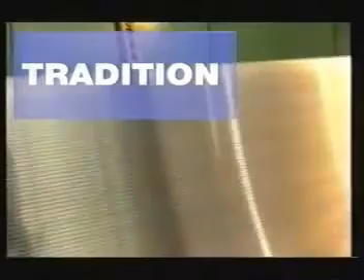Tradition and innovation of constant quality are the reasons for our leadership in the market. The process which culminates in the creation of TIRUÑA corrugating rolls for manufacturing corrugated board. TIRUÑA, the right rollers for the cardboard industry.

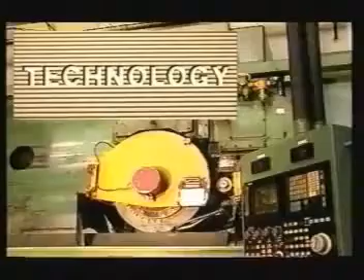Research and development with our own development to suit customers' needs. Technology with an exclusive process in the sector, starting from solid stocks of forged steel. Using the most advanced technologies, including induction hardening, we design the right flute profiles for each type of production, customizing each set of rolls. Hardness, dimensional, electronic controls, etc. are made throughout the productive process to allow us to guarantee its perfect operation.

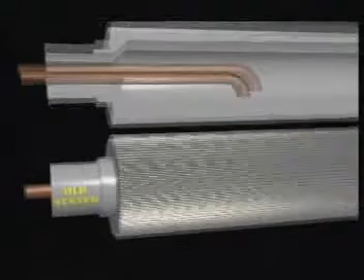Leadership. It is the superior quality of our products which make us world leaders in this sector. Talleres TIRUÑA has investigated with the sole object that our rolls solve all the needs of our customers, to produce more and better. The problem of condensate inside the rolls is a traditional one which provokes different temperatures over the surface and deformation on the rolls.

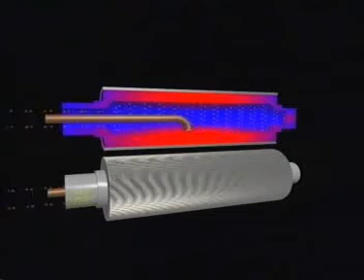Why is this produced? When the traditional siphon system is working, it expels the condensate in the rolls, but there is a different distribution of heat over the whole active surface. The condensate goes to the bottom when the rolls stop.

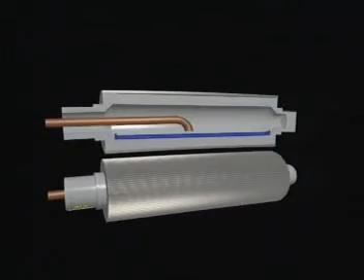The siphon system, when stopped, expels the water up to the level of the siphon, which means a different distribution of heat, provoking enlarging of the rolls, familiarly called the banana effect. The extraction of condensation from the traditional system with siphon pipes provokes a twisted effect when running or after stoppages,

resulting in a few meters of defective board. Furthermore, strong tensions are provoked which mean many times the breakage of teeth in the edges. A solution has been developed as a result of our own investigation.

The TIRUÑA Dry Dynamic System. It is an exclusive system without siphon pipes, patented by us, which allows you to work without condensate. This means a uniform temperature through the whole surface, avoiding any deformation of the rolls. Steam enters the roll chamber, which is sloped to help the condensate reach the exit point.

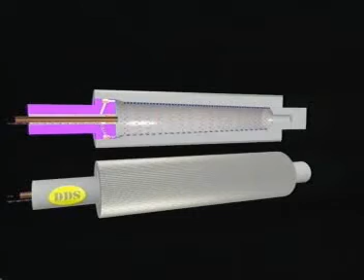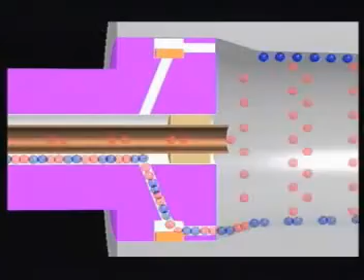Whether the rolls are running or stopped, a continual removal of condensate and non-condensable gases is guaranteed. The advantages are prevention of the twisted effect during stoppages, maintenance of dimensional stability of the rolls, greater heating capacity, uniform temperature in the rolls, minimal maintenance requirements, and the production of good board from the first meter.

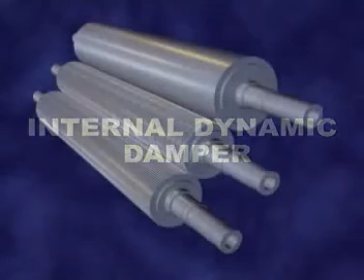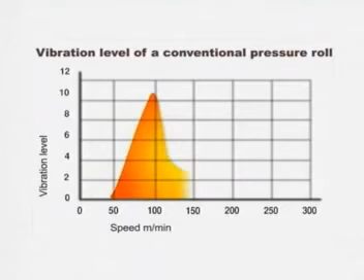IDD pressure roll. In the traditional design of the single facer with 2 corrugating rolls and a pressure roll, we face 2 or 3 critical speeds where the harmonic frequencies on the mentioned rolls coincide. They are produced approximately at 90 to 120 and 180 to 210 meters per minute. The first critical speed normally represents a problem when we manufacture double or triple wall, but the second and even the third critical speeds would be a problem mainly when we produce single wall.

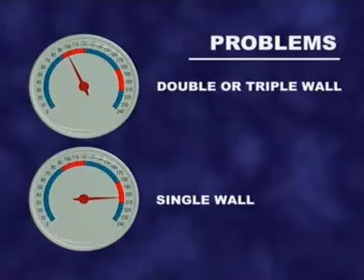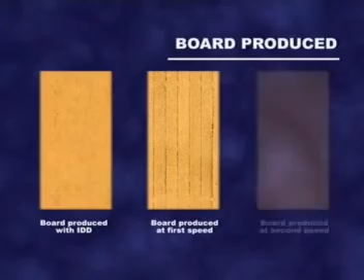The boards manufactured at these speeds are characterized by showing big pressure marks of the pressure roll on the inner liner. These marks, that usually show highs and lows, can even break the liner when the pressure roll contacts the tip of the flute, which means rejection problems of the board produced by the end user.

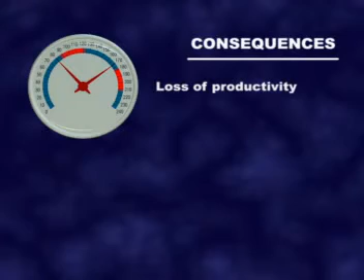If the type of machine and production does not allow us to work over these critical speeds, we would face important losses of productivity. Otherwise, provided we are able to increase the working speed over these critical speeds, the quality of the board manufactured would be reduced along this critical speed.

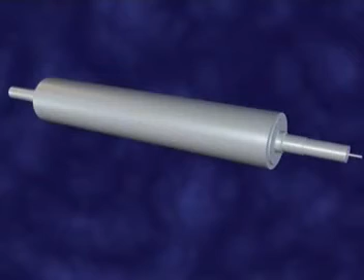In order to give a solution to this problem, TIRUÑA has designed the IDD pressure roll. Based on the experience achieved with the DDS system of condensate extraction without siphon pipe, TIRUÑA uses the interior of the IDD pressure roll so as to install a capsule that incorporates damping components.

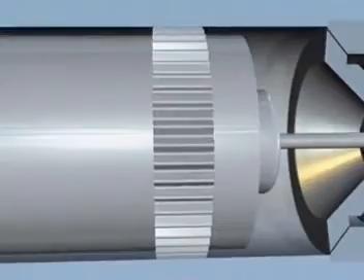These softening components are specifically tailor-designed depending on the resonance values measured by our specialists during a visit made to the customer's plant. Once these values are defined, the corresponding IDD system is developed and the new pressure roll is installed.

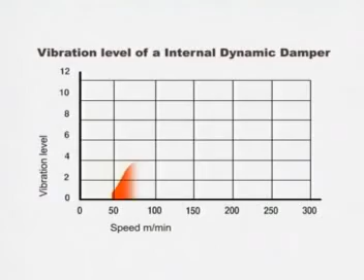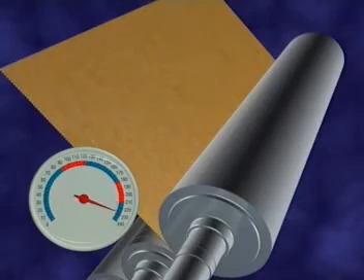The IDD pressure roll absorbs the vibrations produced during the critical speeds of the single facer from the moment of its installation in the machine, and it does not require any specific technical training of the workers, and the vibration values do not affect the quality of board manufactured during the critical speeds.

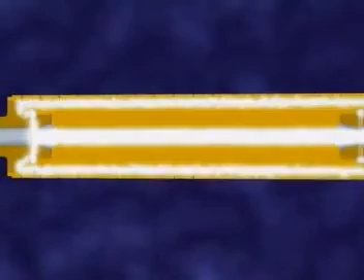Peripheral heating. The peripheral heating system is characterized by the steam circulation through longitudinal conduits located near the periphery of the corrugating rolls. In this way, and due to the high steam circulation, the condensate produced during the heating of the rolls is removed by the steam itself, avoiding its accumulation and therefore the origination of the condensate layer that makes the heating difficult. That is how the banana effect is avoided.

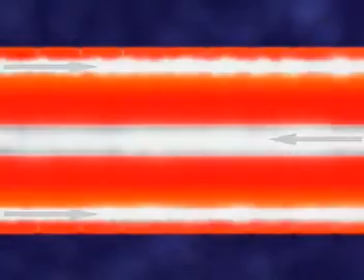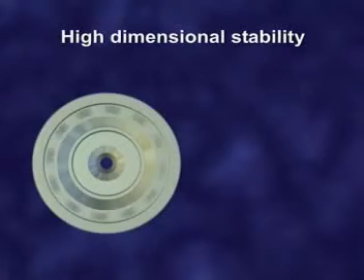Moreover, the design of the longitudinal channels that go through the whole width of the roll allows the heat to be distributed uniformly all along the surface, and the cold points on the edges are prevented. On the other hand, and due to the fact that the mass of the rolls is always at the same temperature as the steam, a high dimensional stability on the rolls, independently of the working speed, is achieved.

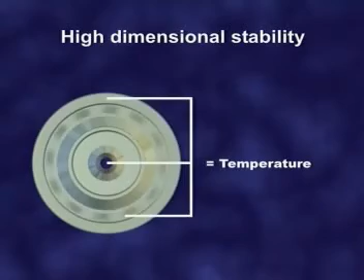The area on the surface that can really cool the paper is very small, and the inner area at high temperature is able to keep the dimensional stability. Thus, the heating surface that is obtained is sensibly higher than the one obtained with a steam chamber, which allows even to increase the mass and rigidity of the rolls. We can then reduce the flexion and give more stability to the splicing, and the vibration level is reduced.